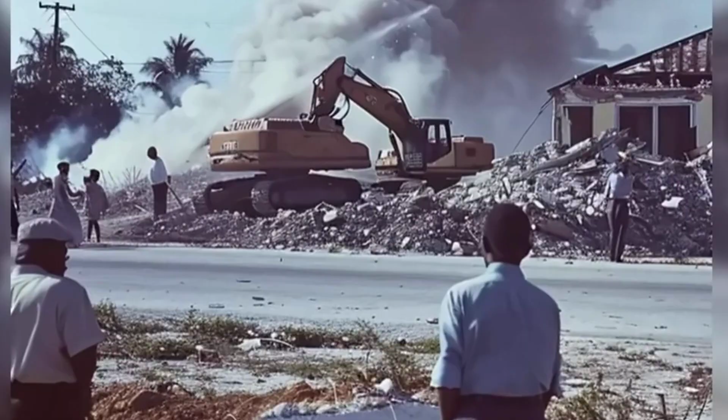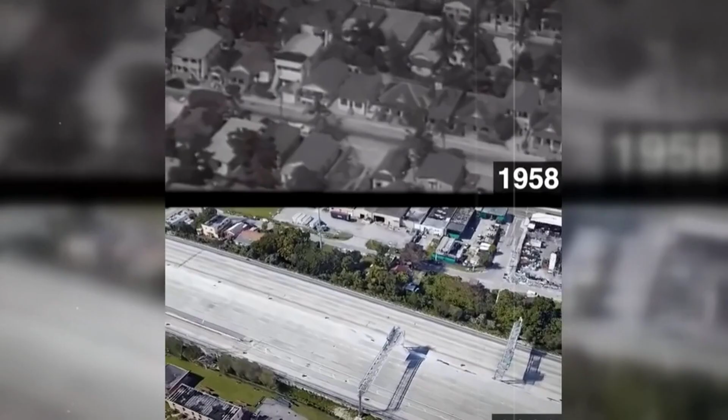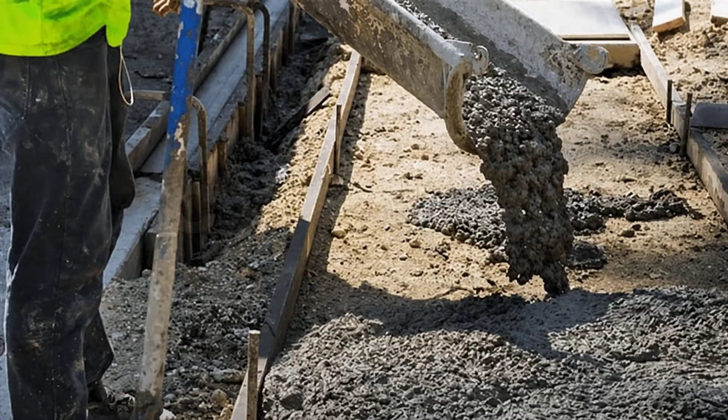The cause was not economic obsolescence, not population flight, not the abstract forces of urban change that cities sometimes invoke to explain the disappearance of communities that inconvenience their growth ambitions. The cause was concrete. Specifically, it was Interstate 95 and Interstate 395. City and state planners, using federal funds provided by the 1956 Federal Aid Highway Act, routed the new expressways directly through the center of Overtown.

There was an alternative. Engineers had studied a route that would have carried the highways along an existing railroad corridor with minimal residential displacement. The white business community opposed it. That route, they argued, would limit the westward expansion of downtown. So the highways went through Overtown instead.

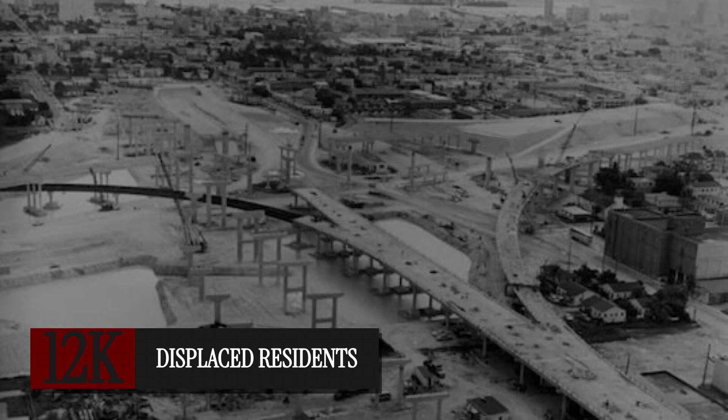40 city blocks were demolished. 12,000 residents were displaced. Initial projections had estimated fewer than 6,000, a number later revised upward by historians who counted more carefully than the planners had. Very few of those displaced received meaningful relocation assistance. Most moved north to Liberty City and Opa-locka and other neighborhoods that bore the secondary consequences of their arrival.

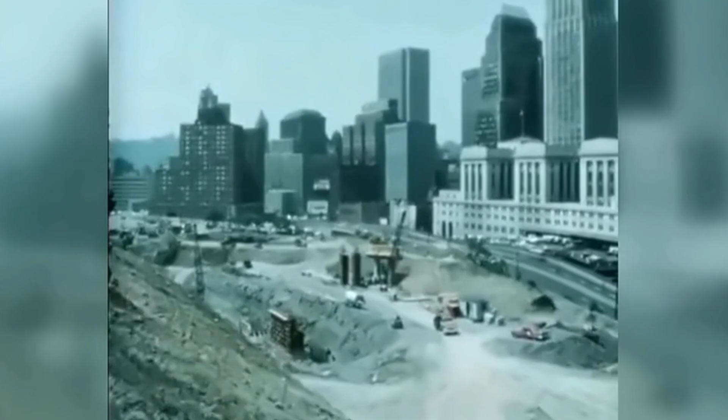Overtown, the Harlem of the South, was buried under a highway interchange. For 60 years, that interchange sat above the neighborhood it had destroyed. The concrete was low-slung and utilitarian, the expressway engineering of an era that did not think much about what its infrastructure looked like from below, because the people living below it were not the intended audience.

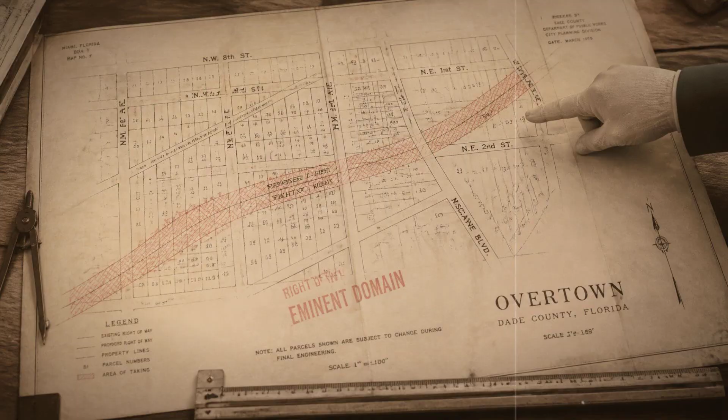Overtown, over those 60 years, became one of the poorest communities in Miami-Dade County, characterized by vacant lots, abandoned buildings, and the permanent ambient roar of highway traffic overhead. The community had been used as a corridor, and the corridor had never been given back.

This is the story into which, in 2017, the Florida Department of Transportation dropped an $802 million construction project.

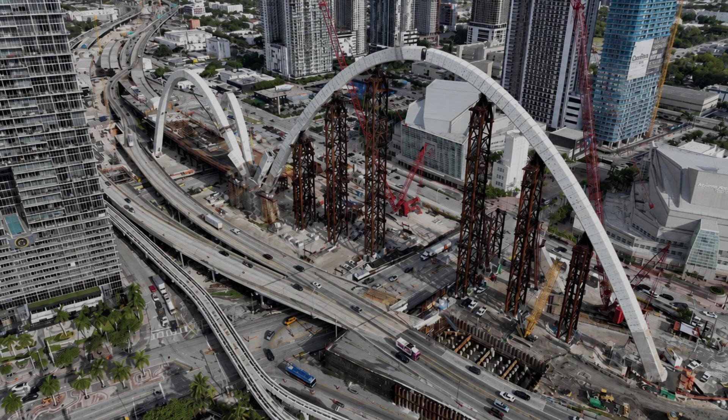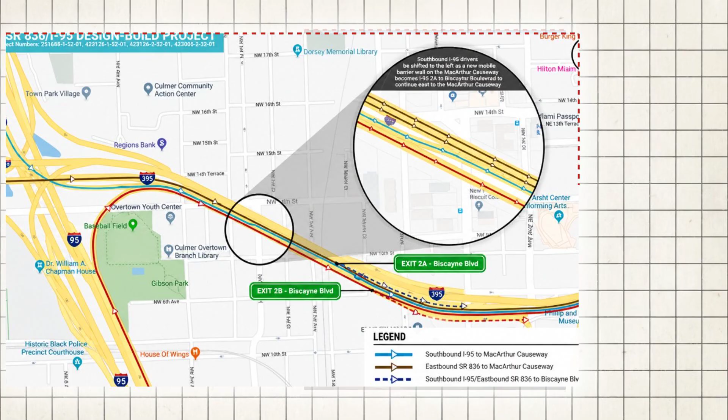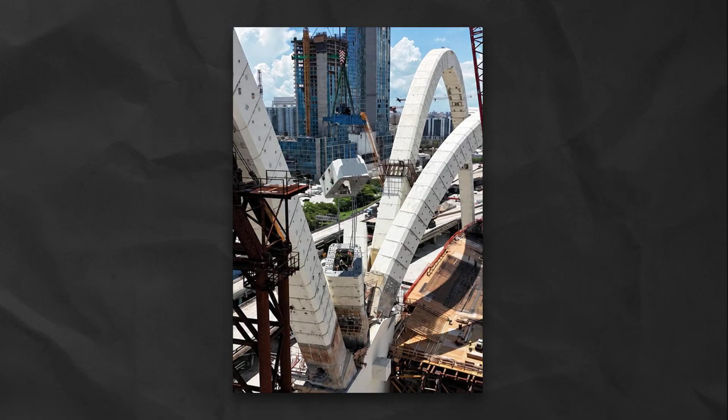What follows is the full account of the I-395 Signature Bridge, a project that began as a highway reconstruction, became an icon-building exercise, and has spent the better part of a decade demonstrating that in South Florida, the distance between a ribbon-cutting rendering and an open road can be measured in hundreds of millions of dollars, and no one held clearly accountable. The project is formally called the I-395 SR-836 I-95 Design-Build Project.

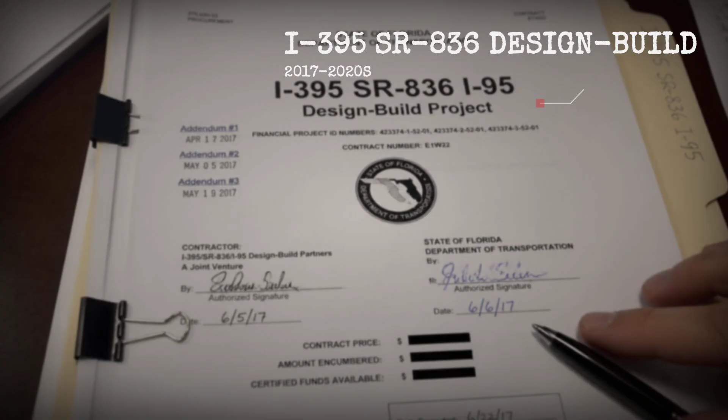Its centerpiece is a bridge structure spanning 1,025 feet over Northeast 2nd Avenue and Biscayne Boulevard in downtown Miami, 6 sweeping arches that its builders have nicknamed the Fountain. The arches rise in a pattern that some observers have called elegant and others have called a high-tech tarantula, depending on disposition and the particular traffic jam in which they were sitting when they formed the opinion.

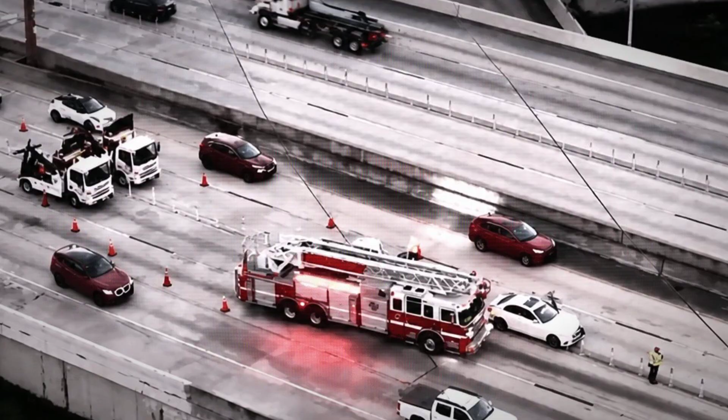The project had been under discussion in various forms for more than 30 years before construction began. FDOT held roughly 150 public presentations between 2004 and 2009 alone. The original highway infrastructure was aging, undersized, and dangerous. The I-95 and I-395 interchange was one of the most congested and accident-prone in South Florida, and the existing bridge over Biscayne Boulevard lacked the lanes and geometry to handle the traffic volumes the region's growth was generating.

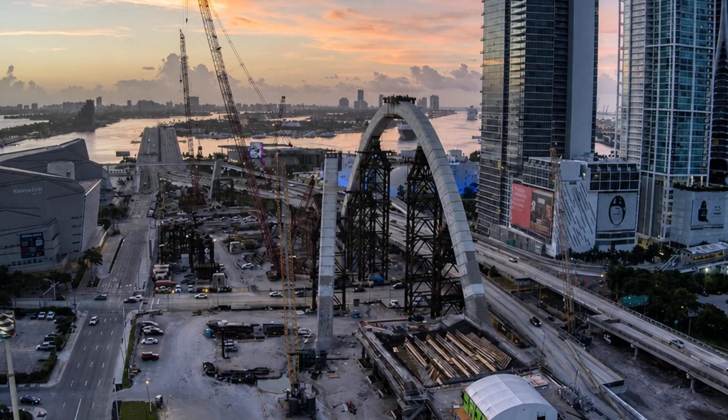There was a legitimate engineering case for rebuilding it. What was less clear, and what has never been cleanly resolved in the public record, was the case for the 6 arches. The design was created by Donald MacDonald Architects and positioned from the outset not merely as a highway replacement, but as a civic landmark.

A structure visible from the Port of Miami, an element that would redefine the downtown skyline, a bridge that would do for Miami what iconic bridges do for the cities fortunate enough to have them.

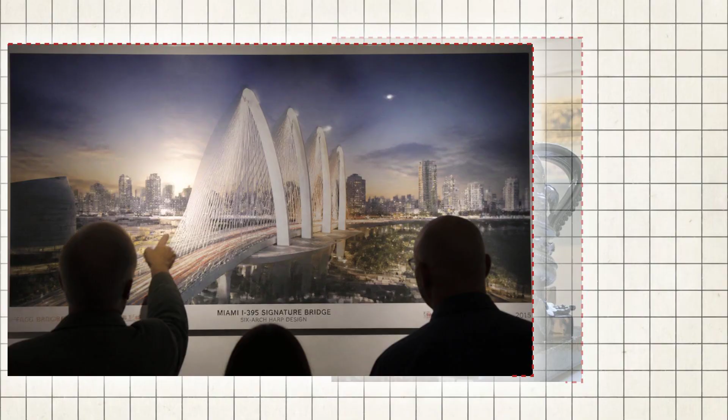FDOT described it as a signature architectural element. The builders called it the fountain. The press releases used the word iconic. The rendering showed something that looked, in the right light, like a harp or a crown, or a very large piece of public art placed astride one of the more congested interchanges in the southeast United States.

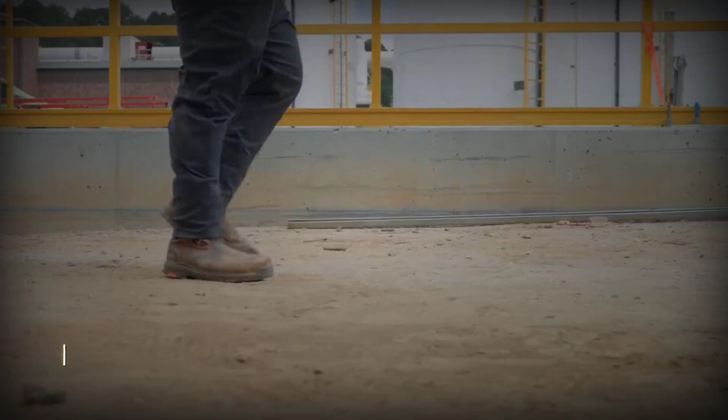The contract was awarded in 2017 to the Archer Western de Moya joint venture, a partnership of Atlanta-based Archer Western Construction and Miami-based de Moya Group, both experienced highway builders. The engineering design subcontractor for the signature bridge structure specifically was HDR Engineering, a Nebraska-based firm with an extensive portfolio of infrastructure projects.

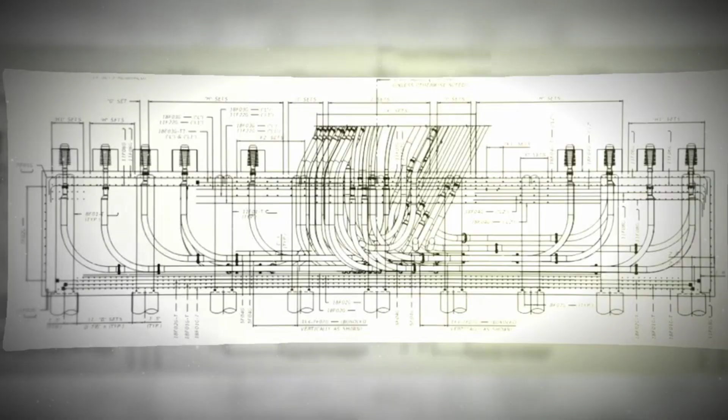The guaranteed maximum price to FDOT was fixed as part of the design-build contract. The joint venture would be paid a lump sum to deliver the bridge, regardless of what it ultimately cost to build. Construction was set to be complete by 2021.

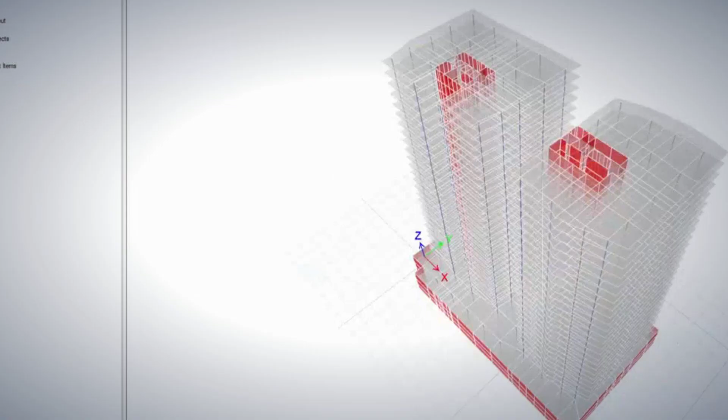The joint venture had committed to its price based on HDR's preliminary design drawings. Those drawings, according to lawsuits later filed by the joint venture, contained a fundamental error. HDR's senior engineer, the lawsuit alleged, had used the wrong code for wind calculations, the wrong gust factor and drag coefficient.

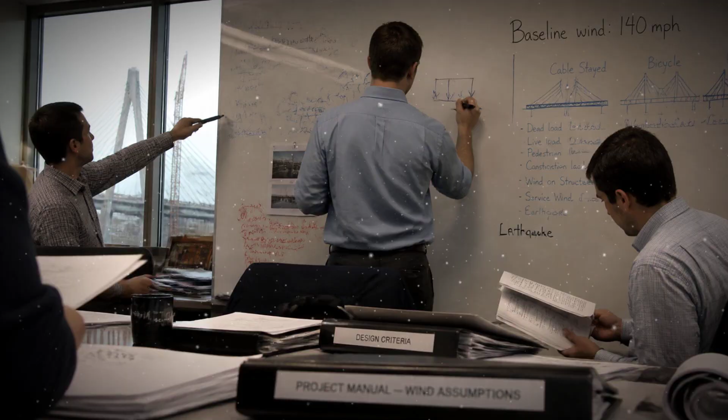He had, the lawsuit alleged, no expertise with wind calculations. The arches, as originally designed, would not have been able to withstand winds of up to 140 miles per hour, the category of hurricane the structure was required by Florida building standards to survive. In a state where the threat of hurricane force winds is not a contingency but a design requirement, a baseline assumption from which all structural planning begins.

The signature element of an $802 million bridge had been designed by an engineer who, according to his own employer's legal adversaries in subsequent proceedings, lacked the relevant expertise and used the wrong numbers.

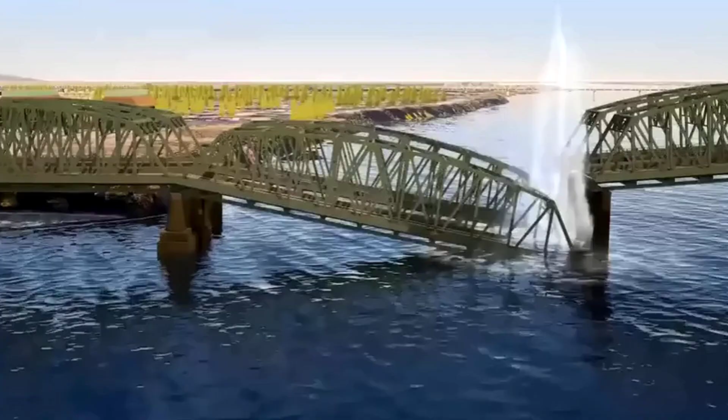HDR disputed the characterization. The company maintained that the drawings in question were conceptual and preliminary in nature, intended as a competitive design proposal rather than a final engineering document, and that wind load calculations would be completed during the formal design phase. The joint venture's position was that by the time HDR had disclosed the problem and completed the redesign, the lump sum price with FDOT had already been locked in.

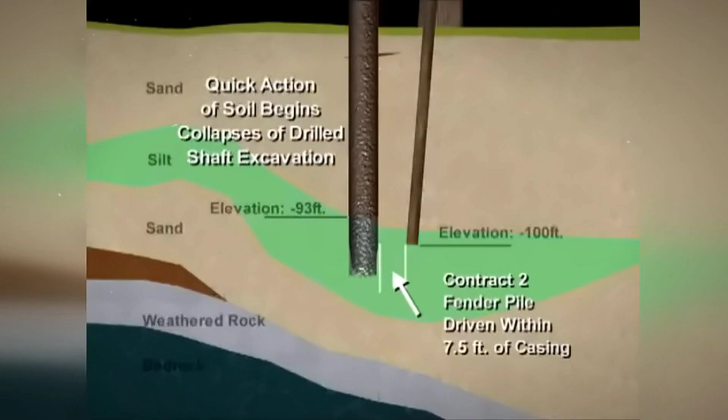The contract, as the joint venture later put it in a federal filing, required that the engineer complete key design criteria, including wind loads, before the final price with FDOT was guaranteed.

HDR had certified the design as viable. The joint venture had bid on that certification. The price was fixed. Then HDR changed the design.

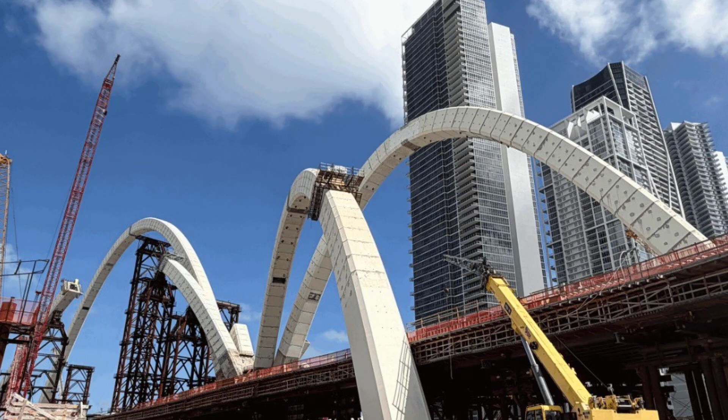Redesign required widening the arch ribs to allow for installation of additional post-tensioning and reinforcing steel. By the time FDOT approved the changes in May 2019, 10 of the 18 months allocated for design activities in the project schedule had already elapsed. The joint venture had lost more than half its design window before a single arch had been built.

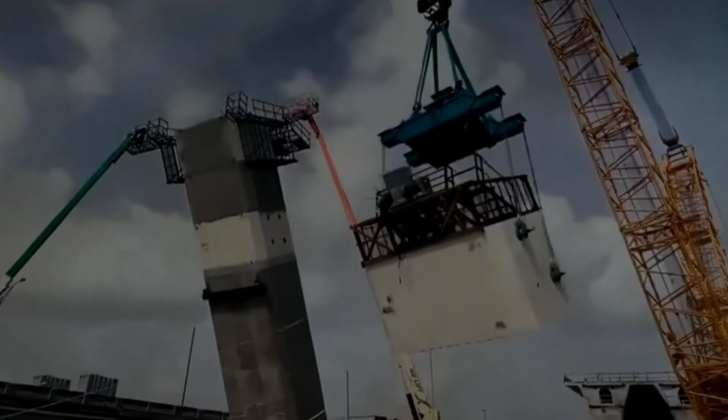According to the lawsuit, the cascading consequences of that lost time, additional design costs, construction costs, supervision costs, quality control, inspection, expert investigation, and attorney's fees amounted to $405 million in total damages.

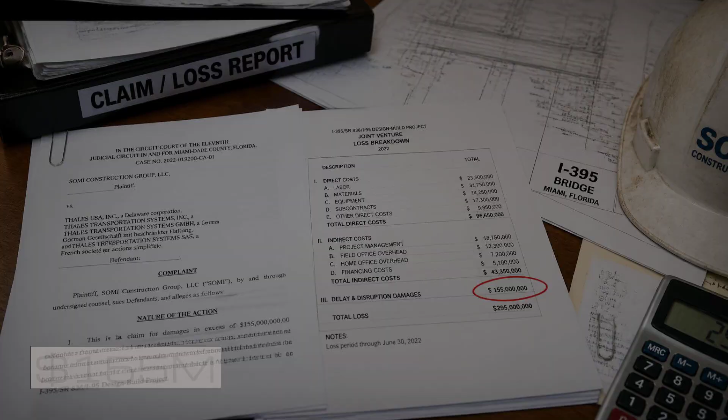In 2022, the joint venture filed a lawsuit against HDR seeking to recover more than $155 million. In parallel, it filed a separate lawsuit against HDR's insurers, seeking to access coverage that the joint venture argued applied to the damages it had sustained.

The lawsuit against HDR went to trial preparation in federal court in Miami over the next 2 years. In January 2025, the presiding judge issued a ruling that the joint venture had sought to avoid. HDR's conduct, the judge found, did not rise to the level of gross negligence. That ruling was consequential because it capped the amount the joint venture could immediately recover at $10 million.

The limit of the insurance policy, HDR was contractually required to obtain, after legal defense costs had eroded the available coverage. A settlement was reached in 2025 in which HDR agreed to pay $12 million and the joint venture released $30 million in withheld fees.

Neither party admitted liability. The engineering firm that the joint venture alleged had made a fundamental wind calculation error on a bridge in one of the most hurricane-prone cities in the United States walked away from the lawsuit having paid $12 million against claimed damages of more than $400 million.

That gap between $12 million and $405 million was not absorbed by HDR. It was absorbed by the project. It is embedded in the cost overruns and schedule extensions that the public has been paying for, in traffic disruptions and lane closures and detours since construction began.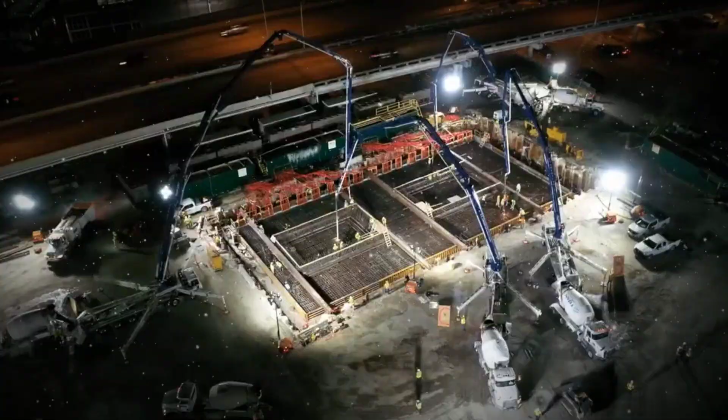There was also a separate mechanical problem. At the on-site concrete plant used for the project, a mechanical failure went undetected for approximately 3 months. During that period, the lawsuit alleged, adulterated concrete was poured into critical structural elements. The repairs required were estimated at $3.6 million. The time required to identify the problem, stop the pours, and address the affected structures extended the schedule further.

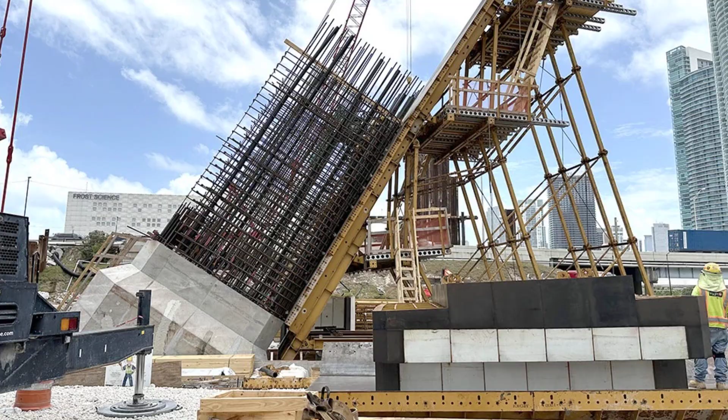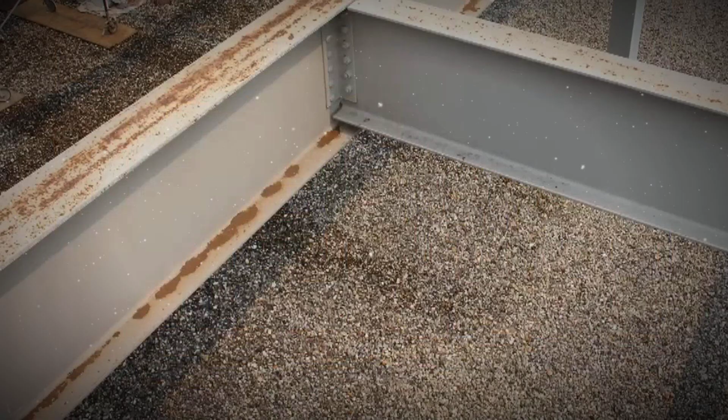The Florida Department of Transportation, in its public communications about the project, attributed the delays to weather, supply chain disruptions, utility relocation complications, and a bid protest filed by a losing joint venture that set the start back by a year. These explanations were accurate as far as they went.

They did not disclose the wind load miscalculation, the concrete contamination, the litigation, or the settlement until investigative reporters obtained court filings and published them in early 2026.

For years, the people who paid tolls to cross Miami-Dade's expressways, whose money funded the project, were given weather and supply chains as the explanation for why a bridge that was supposed to open in 2023 still had no completion date they could rely on.

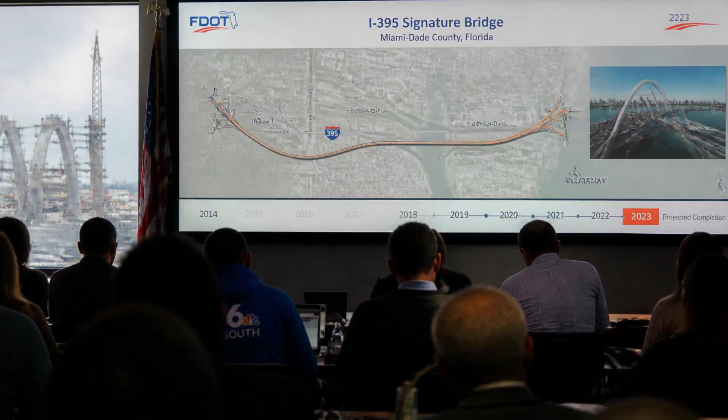In 2023, the projected completion date moved to 2027. In mid-2025, the Florida Department of Transportation quietly updated the project website to reflect a new completion date of 2029 and a new cost of $866 million, an increase of $64 million over the original contract price, not counting any costs the joint venture has absorbed or is still pursuing through litigation.

The Florida Department of Transportation made no public announcement. The Miami New Times noted that the update happened silently, without press release or public notification. Journalists contacted the department for comment. It did not immediately respond.

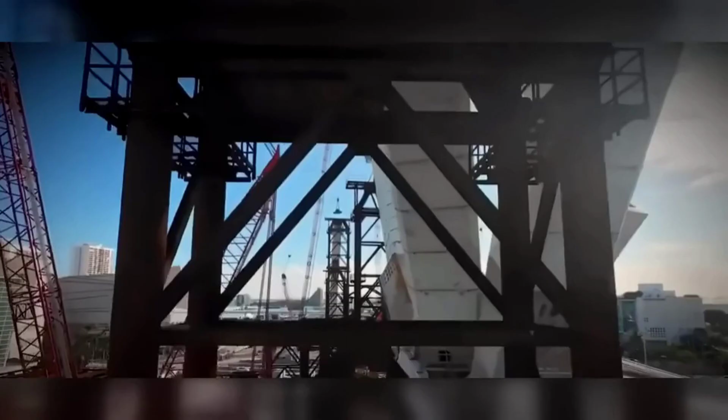Transit Alliance Miami, a transportation advocacy organization, described the project as a decade-long $840 million bottleneck. A county commissioner called it a mixed blessing, acknowledging its long-term value while expressing concern over the extended disruption to downtown. An independent engineer suggested forming a public panel to review the project and communicate its status transparently. That panel has not been formed.

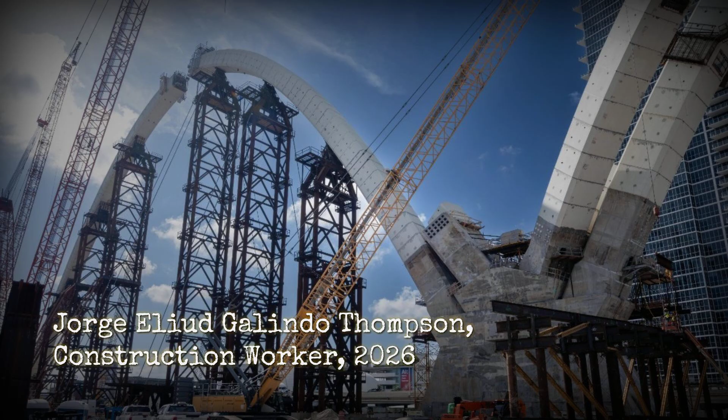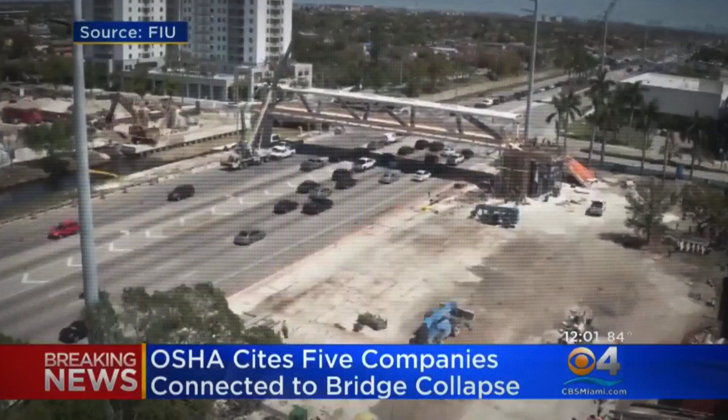In 2026, a construction worker named Jorge Eliud Galindo Thompson fell 20 feet from an overpass on the project site onto Biscayne Boulevard and was pronounced dead at the scene. His death came months after a separate incident in which a toppled concrete beam sent six workers to the hospital. OSHA opened investigations into both incidents. The Department of Transportation issued condolences.

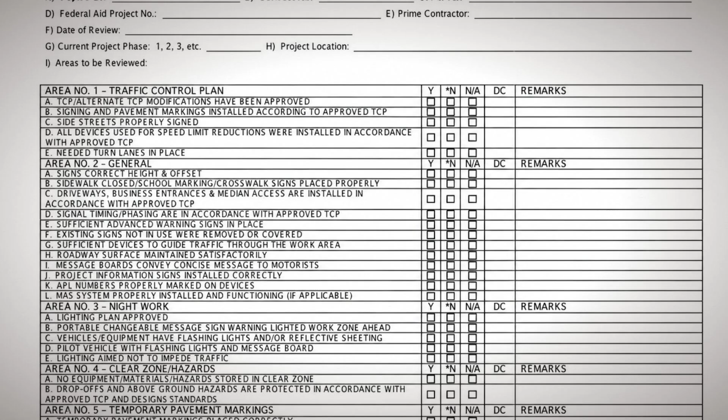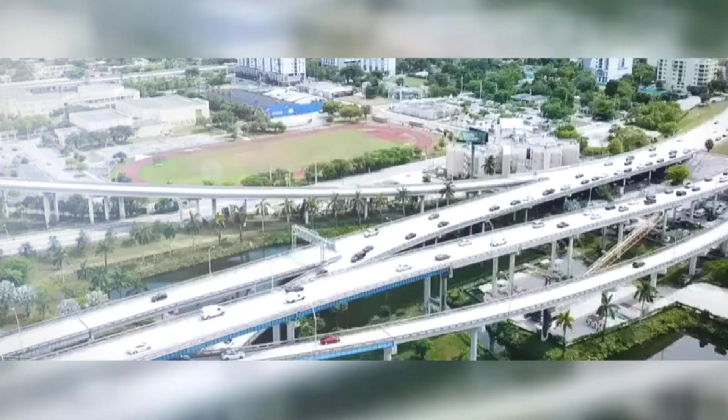The question of what the bridge is actually for has been answered differently by different parties over the course of its construction. The Florida Department of Transportation's own environmental impact statement for the project, prepared before construction began, identified the primary community benefit as savings in time and fuel provided by increased highway capacity. Those benefits, the environmental analysis noted, would primarily accrue to the people driving over the neighborhood, not the people living in it. For a project that had been justified, in part, as a step toward repairing the damage done to Overtown by the same highway in the 1960s, this was a revealing formulation.

The highway would be rebuilt for the benefit of the commuters. The community that had been destroyed to make room for the original highway was receiving a different kind of benefit: a park underneath.

The underdeck, officially renamed the Reverend Edward T. Graham Heritage Trail, is a 33-acre linear park planned for the space beneath the Interstate 395 viaducts, stretching from Northwest 3rd Avenue to Biscayne Bay. The city of Miami secured a $60 million federal grant through the Biden administration's Reconnecting Communities program, the largest federal grant in Miami's history, to fund the park's construction.

The Trump administration rescinded that grant in 2025. The city said it remained committed to the project. No replacement funding has been identified.

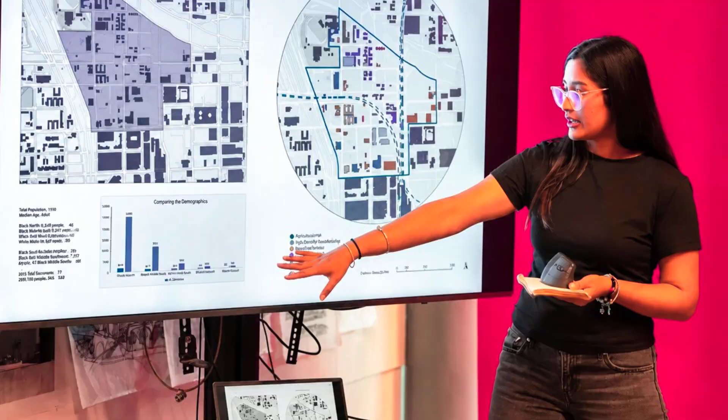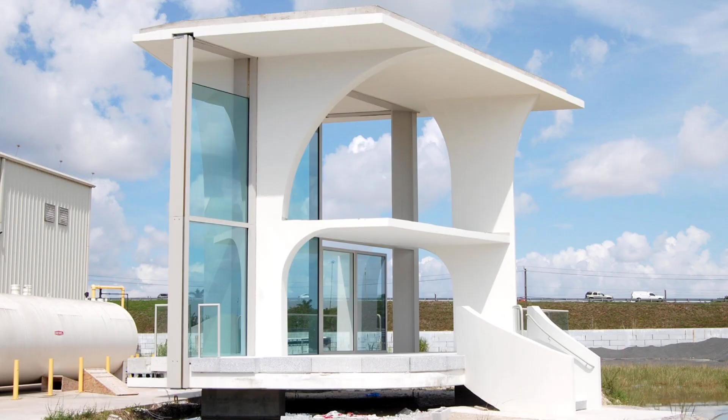The concept of the park is genuine, and the intentions behind it deserve acknowledgement. A mile of open public space beneath a highway that once erased a neighborhood, honoring the civil rights leaders and the history of the community through ceramic panels and an amphitheater and urban gardens—this is not nothing. It is the kind of gesture that cities make when they have done something irreversible and wish to acknowledge it without undoing it. What it does not do is address what was done.

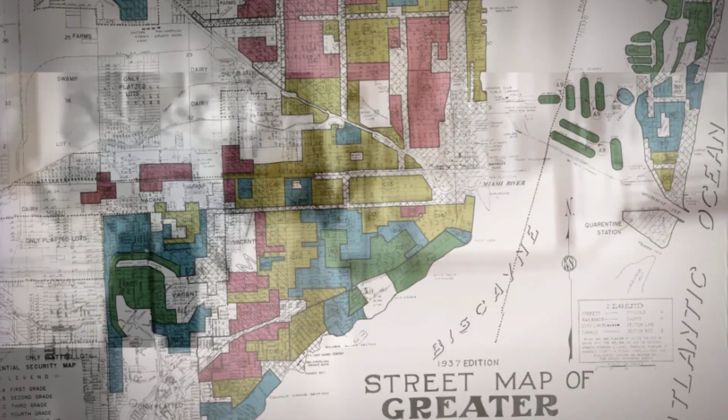The original choice to route Interstate 395 through Overtown rather than along the railroad corridor, a choice made explicitly to protect downtown commercial expansion at the expense of a Black residential neighborhood, displaced 12,000 people, destroyed 40 city blocks, and eliminated a community that had spent two generations building something durable in a city that offered Black Miamians very little else. The descendants of those 12,000 people did not have the option of returning when the highway construction was complete.

The land was gone. The institutions were gone. The commerce was gone. What replaced them was a concrete underpass that, for 60 years, served as both the cause and the memorial of the neighborhood's ruin.

In 2012, the Congress for the New Urbanism placed Interstate 395 on its list of the top opportunities in North America to replace aging urban highways with street-level boulevards, an approach that has been used in other American cities to genuinely reconnect communities severed by mid-century highway construction, returning land to the street grid and allowing neighborhoods to heal across what had been uncrossable barriers.

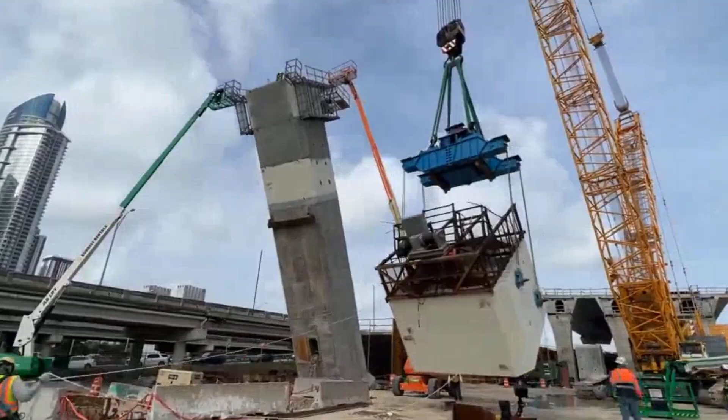Miami did not take that option. Miami built a more elaborate version of what was already there, at a cost that has now reached $866 million and rising, with completion projected for 2029, and a legal dispute over $400 million in claimed damages that resolved for $12 million on the eve of trial.

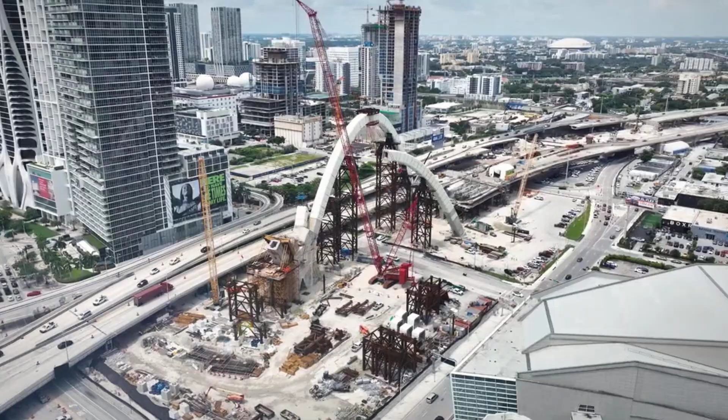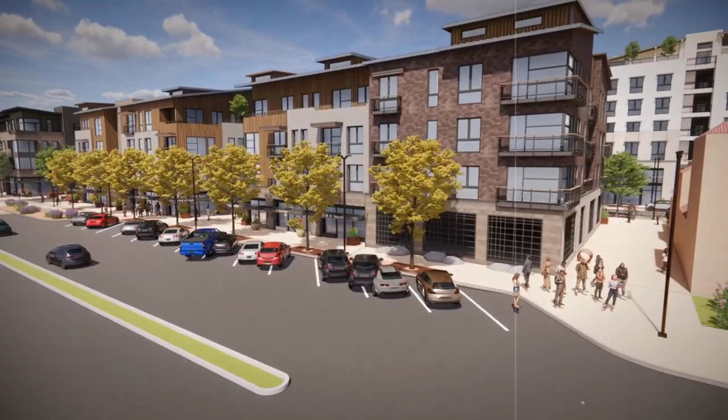The bridge will eventually open. The arches, when complete, will be visible from miles away. The six-arch span over Biscayne Boulevard will appear in travel photography and tourism brochures and architectural reviews. The Florida Department of Transportation will hold a ceremony. Officials will speak about connectivity and investment and the transformation of downtown Miami.

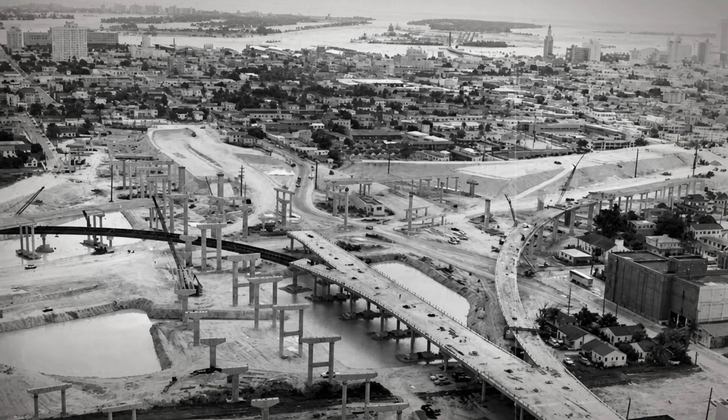The Heritage Trail may eventually be built in whatever form the city can fund without the $60 million that was taken back. Overtown will remain what it has been since 1968: a neighborhood that was destroyed by a highway and offered, in return, a park beneath the highway that destroyed it.

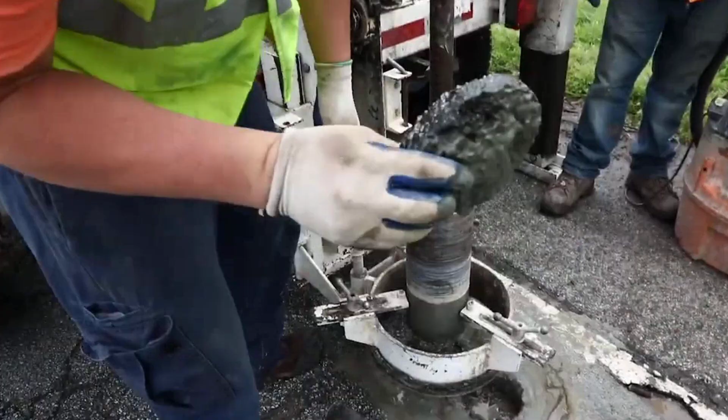The $12 million settlement with the engineering firm, whose wind calculations were allegedly wrong, will not appear in any of the ceremony remarks. The $400 million gap between what was claimed and what was recovered will not be mentioned. The concrete that was adulterated for three months before anyone noticed will not come up.

What will be said is that Miami now has an iconic bridge. What will not be said is what it cost to build, who paid for the decisions that made it cost that much, and what the community underneath it was offered instead.